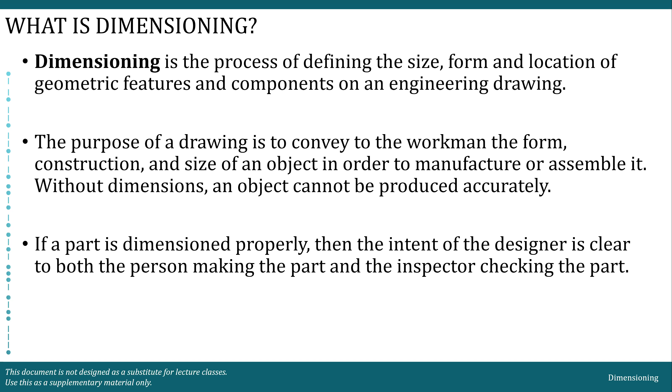We have different elements of a fully described drawing. We have the graphics. The graphics is yung mismong multi-view. Okay? And we have the dimensions. Yun yung ating gagawin today. And also the words, which are notes, which are also part of this lecture na dimensioning.

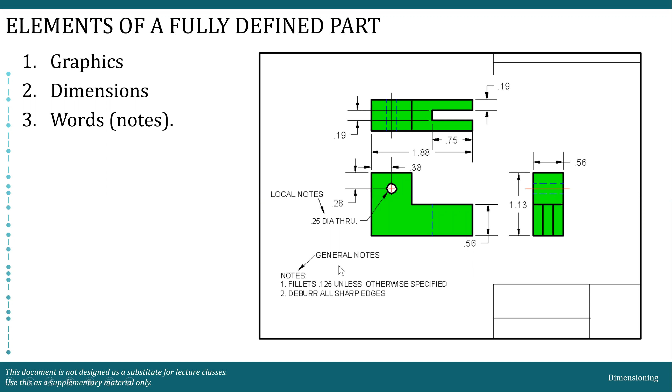So kung titignan natin dito, ito yung graphics natin, yung kulay green. Then the dimensions, marami yan. Yung numbers, yung lines, yung arrowheads, they are all parts of the dimensions. And notes, we have two types of notes. Generally, we have the local notes and we have the general notes. So yan, medyo madami-dami ito, pero madali lang naman silang intindihin.

So first, kailangan nating i-identify kung ano-ano yung components ng ating dimensions. Okay? We have what we call the dimension line. Dimension line is a thin, solid line which shows the extent and direction of a dimension. Dito sa dimensioning, lahat ng dimension lines, arrows, extension lines, leader lines, gagamitan natin ng HB pencil. Dark pencil siya, hindi siya H. So in dimension lines natin, example, this one, yung may arrowhead. This is your dimension line.

This is also a dimension line.

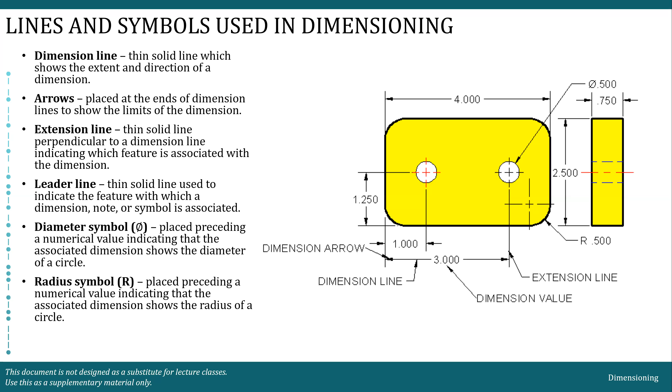As I've mentioned before, dalawa yung general na pinaggagamitan natin ng dimension: to identify the size and location. So yung mga dimensions natin could be either a size or a location dimension. For this example, itong dimension na 4 units, from this end up to this other end, is a size dimension. This is also a size dimension since it covers from top to bottom, as well as this one. Yung thickness niya, itong 0.750, is also a size dimension.

Itong phi 0.5 is also a size dimension because it describes the size of this hole. Yung radius is also a size dimension because it describes the size of the radius of this arc. Ang example naman ng location dimension ay ito. If we would like to locate the center of the hole, which is usually the case, we locate the center of a circular hole, then that is a location dimension. So hindi lang size, as well as the location, yun yung hinahanap natin. Size and location.

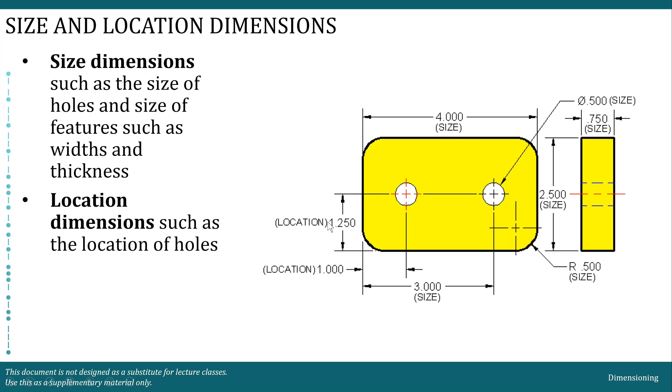Sir, need po ba lagyan ng size and location below the measurement? No. Yung nasa previous na slide, it's just a notation for teaching purposes. Pero sa plates ninyo, hindi kailangang isulat. Kahit sa practice, sa workplace, hindi sinusulat kung siya ay size or location.

Ayun. Wait lang, inom lang ako.

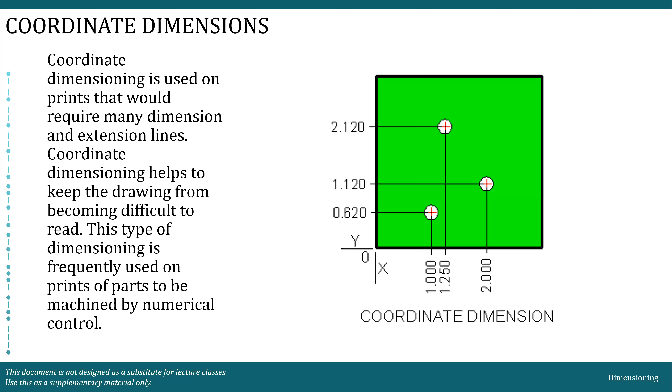Nawala yung isa. Ito pala, na-skip ko pala yun. Okay, merong isa pa, yung tabular dimension. Tabular dimension, as the name implies, meron kang table. So yung location ng A, B, C, D, and E, they are given in a table form. So, kailan to ginagamit? When a company manufactures a family of parts or assemblies that are exactly alike in shape, except for dimensions, tabular dimensioning is used on a drawing. Letters and numbers in a tabular form are used instead of dimensions to denote the size.

So kapag, let's say kunyari, kailangan mo mag-manufacture ng exactly the same shape na may ganitong distribution ng holes, tapos magkakaiba yung size. Let's say meron tayong small, medium, and large. So, instead of producing individual drawings and measurements and regular dimensioning, tabular yung ginagawa. So, meron ka na lang isang drawing plus, kunyari, small, medium, and large yung ginagawa mong object, then meron kang tatlong tables applicable to the same drawing.

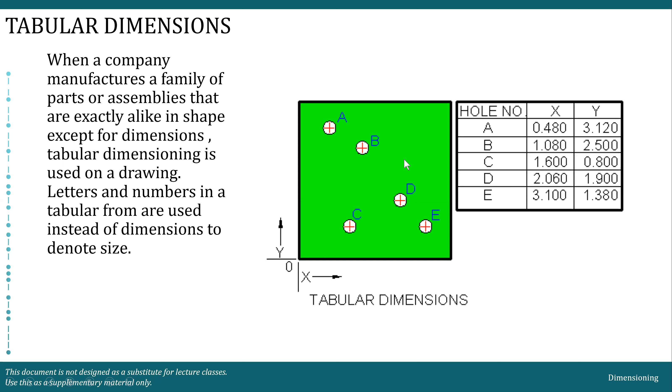Okay, so I've mentioned earlier that notes is a part of a fully described drawing, and we have two types of notes. The first one is what we call the local notes, and the other one is general notes. Local notes pertain to a specific area of an object. Local notes are pointed to a specific feature with a leader attached. Example nito, kunyari, describe natin itong hole na to. So ito may leader line ka. Ang tawag natin dito, this is a local note. By the way, dito meron ka nakikita nakasulat DIA. This stands for diameter. So 0.25 yung kanyang diameter.

Itong ganitong notation, yung DIA, this is an old notation. So hindi niyo siya dapat gamitin ngayon. Paano nga kapag diameter? Ang kailangan nakasulat sa inyo, meron kang phi sa unahan. So, phi 0.25. Tapos wala na itong diameter. Ito lang yung nagamit ko na picture kasi ito yung merong nakasulat ng local note. Then, ito is applicable only to this feature. That's why it is a local note.

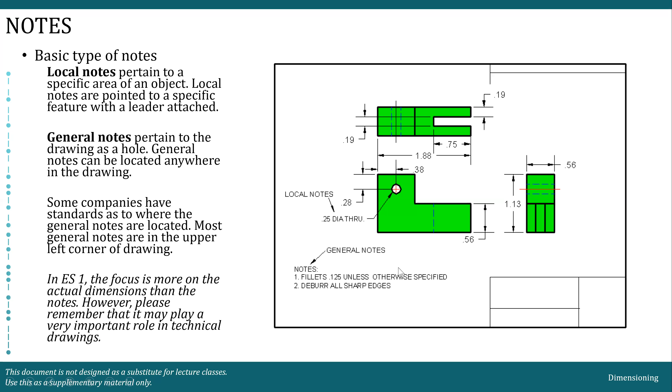Pag naman general note, this is applicable to the whole drawing. So, general notes pertain to the drawing as a whole. Dapat to may W. A whole. General notes can be located anywhere in the drawing. Some companies have standards as to where the general notes are located, and most general notes are in the upper left corner of a drawing. However, in ES1, our focus here is more on the actual dimensions than the notes. So, hindi gaanong pinagtutuunan ng pansin dito yung notes natin. Pero, tandaan nyo na pagdating nyo sa workplace, pwedeng maging importante yung local notes at general notes.

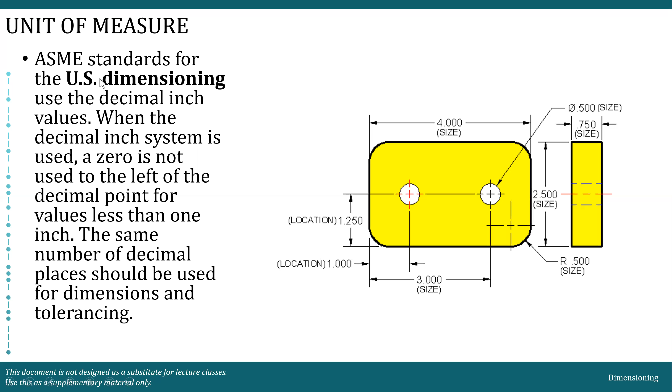Similarly, itong radius na to ay .500. Walang placeholder na 0 sa unahan. So that is US dimensioning or English dimensioning. Kapag metric dimensioning, dahil yun nga yung kinaibahan nila, meron ka namang 0. For example, pag tinignan nyo, R 0.38. So meron ng 0. So this is metric dimensioning. Isa lang yung example dito. So kapag metric, kapag less than 1 millimeter, kailangan lagyan ng 0 sa unahan. Ang daming error. So sa ES1, ang gagamitin natin ay metric. So we will not use the US dimensioning.

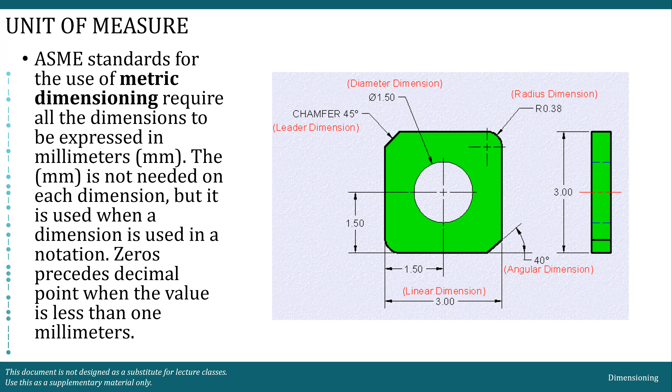Occasionally, a company will use, bakit parang daming error? Will use dual dimensioning, position or bracket method, that is both metric and English measurements on a drawing. We have what we call the position method. So yung position method, either nasa taas at nasa baba yung metric and English, or pwede namang naka-slash siya. Pwede rin naman siyang bracket. So itong letter B, this is a bracket method for dual dimensioning.

So yung isang system, nakadikit sa kanya inside a bracket. Okay? In ES1, since we are not using English, you don't need to worry about dual dimensioning. I'm just showing this to you para kapag nakakita kayo ng ganitong papel, I mean in workplace, alam nyo na this is just a dual dimensioning and you can choose whichever kung ano yung gagamitin ninyo.

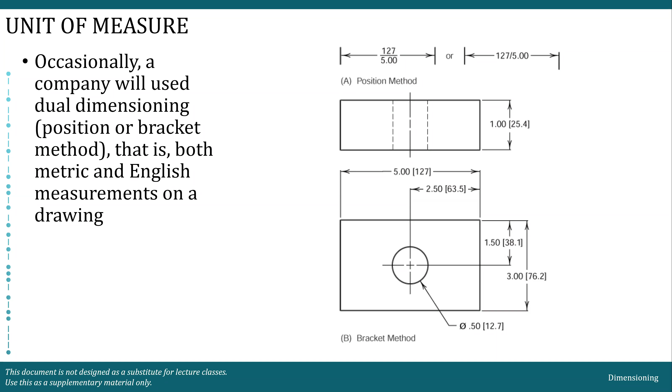So let's now proceed to drawing scale. The measurement of an actual object, not of the drawing, should be written in the dimensions. So kung ano man yung isusulat yung measurement dun sa drawing ninyo, it should be the actual measurement, hindi yung kung gaano siya kalaki sa drawing. Malinaw? So, ibig sabihin, kung magda-dimension kayo ng drawing ng kotse, dapat yung dimensions ng kotse is yung actual dimensions niya, which is, well, sobrang laki. Yun yung isusulat yung number instead of kung anong size niya dun sa drawing.

Okay? So, a scale of 1:2 means that 1 unit in the drawing translates to 2 units in the actual object. Thus, the drawing is smaller than the actual object. Kapag yung scale nyo naman is 2:1, kabaliktaran naman. Ibig sabihin naman nun, yung drawing nyo is mas malaki compared dun sa actual object natin. When writing the scale, you do not need to indicate the units. Instead of writing 1 millimeter is to 2 millimeter, you should just write 1:2.

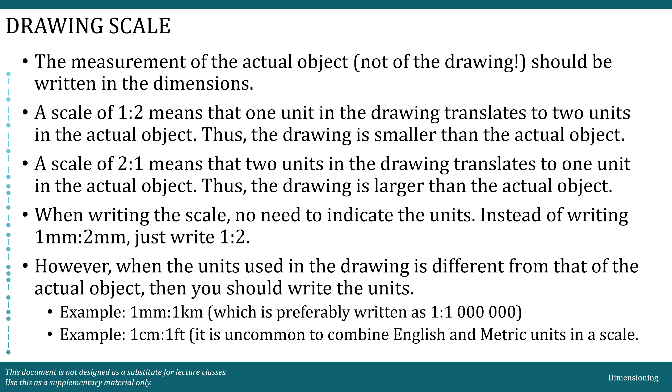Angular dimensions are shown either in decimal degrees or in degrees, minutes, and seconds. For our purpose, sa ES1, it's best that you use decimal degrees. So decimal degrees is the third one. Okay? Kasi medyo mahirap yatang mag-measure kapag ang ginamit nyo ay DMS. Okay? So just stick to decimal degrees.

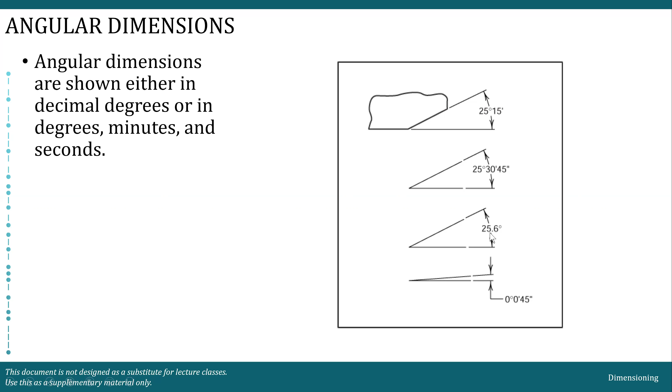Standard practices. First, the minimum distance from the object to the first dimension is 10 millimeters. So ito yun. From the object up to the first dimension line, that should be at least 10 millimeters. The minimum spacing between dimensions or between succeeding dimensions should be 6 millimeters. So from the first dimension, okay, yung susunod na dimension, dapat 6 millimeters apart sila at least.

Sir, pwede bang gumamit ako ng, let's say dito, instead of 10, gamit akong 20? At least naman to. For ES1, it will be marked as wrong. Okay? Kahit na at least yung nakasulat dito, I would like you to observe the exact measurement. Siguro kung 11 millimeters yan, hindi naman napansin yun. Pero as much as possible, you stick to what is written na measurements. So that measurement is from the object itself up to this line. So that's 10 millimeters. And then 6 millimeters ito.

Next, there should be a visible gap around 1.5 millimeters between an extension line and the feature to which it refers. So ito yung object natin. Kung papansinin niyo, yung extension line na to, it does not touch the object itself. So merong small gap, visible gap, approximately 1.5 millimeters na nandyan.

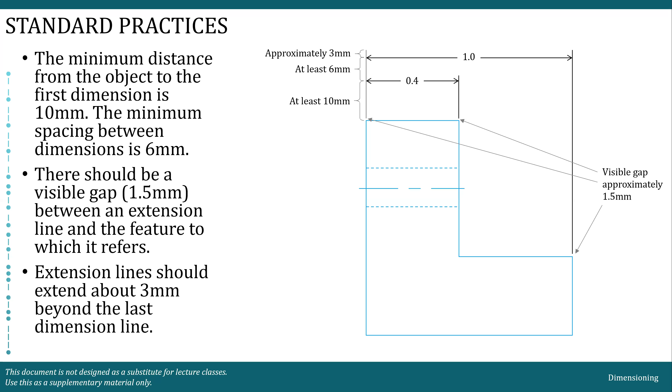Lastly, extension lines should extend about 3 millimeters beyond the last dimension line. So, kapag ito na yung pinakamalayo na dimension line, then there should be an extension of that extension line approximately 3 millimeters. Ito, 3 millimeters din dapat. So, yan yung mga standard practices na ginagamit sa pagdodrawing ng mga linear dimensions natin.

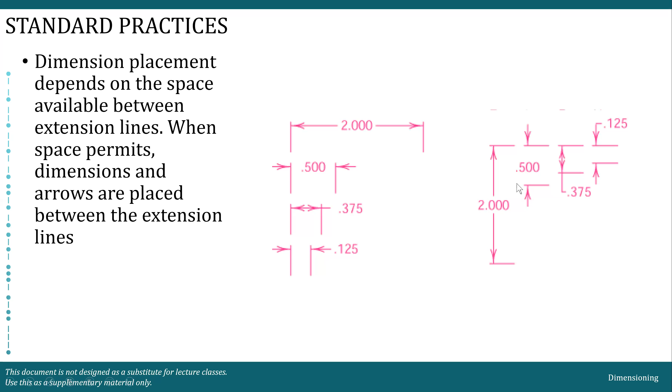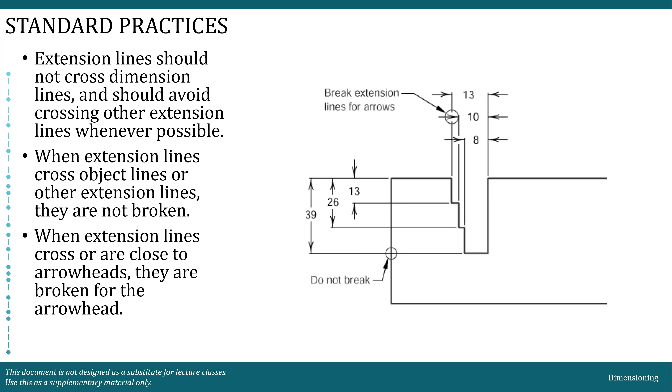When the location of the center of a feature is being dimensioned, the center line of the feature is used as an extension line. Center line. Ano ba yung center line? Center line, para siyang crosshair, di ba? Well, depende sa view, no? Sa circle, center line yung nasa gitna. Ang itsura ng center line, meron kang maliit na cross sa gitna. Tapos, para siyang phantom line. Do you know what phantom line is? Phantom line is an alternating long and short dashes.

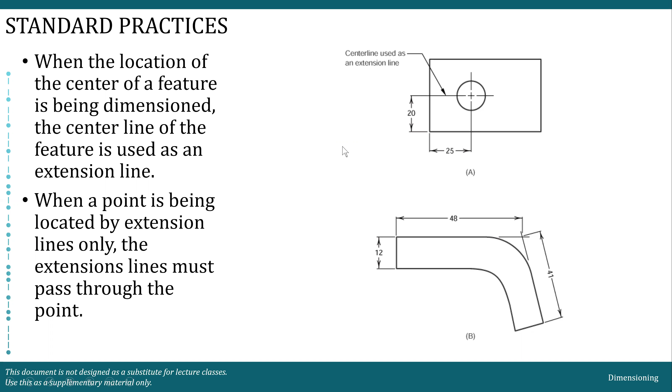Okay. Dimensions are to be kept outside of the boundaries of views of objects wherever practical. So, ulit, basta merong space sa labas ng object, you put your dimensions outside. Do not put your dimensions inside the object. So, this is a wrong dimensioning technique. You should put all of your dimensions outside. Exceptional cases kapag wala talagang space. Kung wala lang space, well, I think hindi naman lahat papasok sa loob. Probably, may cases na yung iba sa loob instead na sa labas mo ilalagay. Pero weird yan kapag masyadong maliit yung space to the point na lahat na ng dimensions nasa loob.

Wait lang ha. Wait lang. Okay.

Dimensions may be placed within the boundaries of objects in cases where extension or leader lines would be too long or where clarity would be improved. So ito yung exemption natin dun sa rule na kailangan nasa labas yung mga extension lines natin. And dimension, sorry.

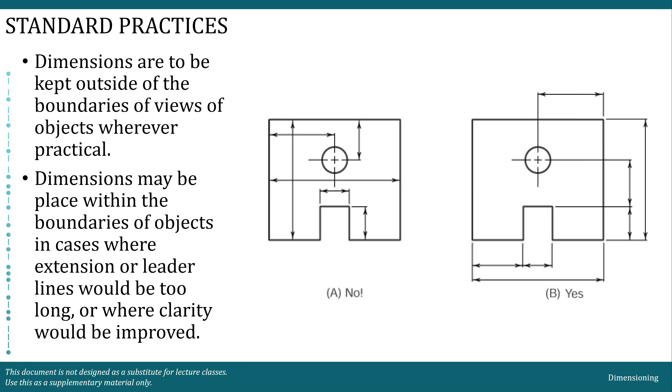What else? All dimension and note text must be oriented to be read from the bottom of the drawing relative to the drawing format. So, ang tawag natin doon, unidirectional dimensioning. Unidirectional, kahit na pag ganito siya, yung text na nakikita ninyo, it could be read from the bottom of the paper. So, kumbaga, yung orientation nila, pare-pareho. Yung lumang standard natin, ang tawag doon aligned. Kapag aligned siya, sinusundan niya yung direction ng dimension line. Then, kapag aligned, the numerals or yung dimension figures can be read either from the bottom or from the right side. Okay?

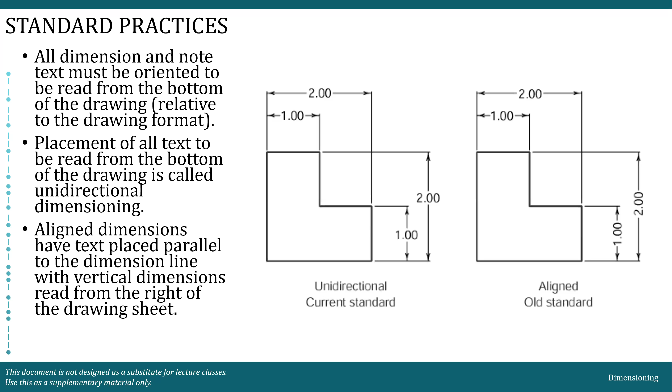If it is necessary to include a dimension which is out of scale, the out of scale dimension text must be underlined. Itong example na to, for workplace settings, sa ES1 din natin to gagawin. Lahat ng drawings ninyo, lahat ng dimensions ninyo, they will be scaled. Walang out of scale sa ES1.

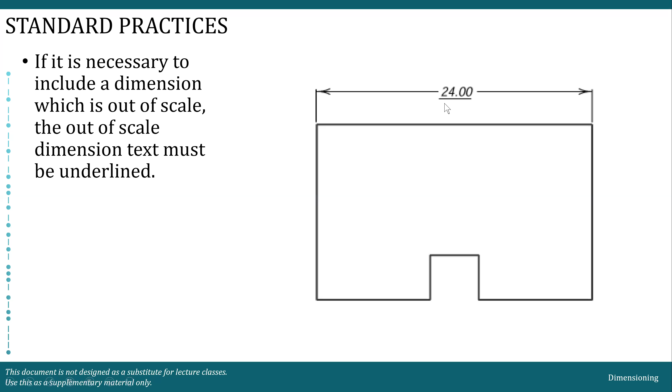In that case, you need to foreshorten, kumbaga, yung length ng rod para mapakita mo pa rin yung detail about the radius or the diameter of the rod. So yung length ng rod would be out of scale, and when you draw it, it should be written na naka-underline.

Okay. Standard practices: the symbol X is used to indicate the number of times a feature is to be repeated, the number of repetitions followed by the symbol X, and a space precedes the dimension text. So dito, 4 times diameter of 0.375, ibig sabihin, merong 4 na holes na ganun ang diameter.

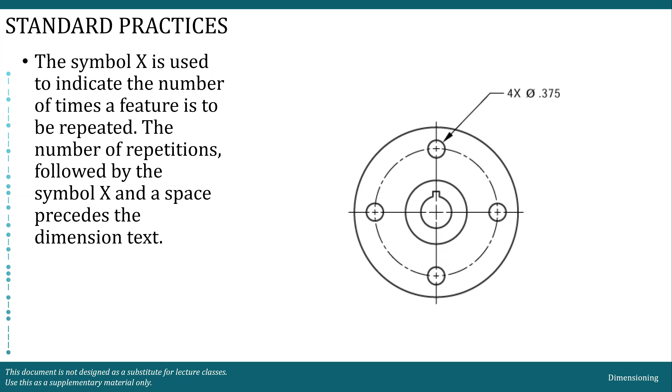By the way, the dimension figures should be written in engineering lettering. So, ibig sabihin, hindi yan pwedeng basta-basta susulat lang. Kailangan may horizontal guidelines tapos naka-engineering lettering.

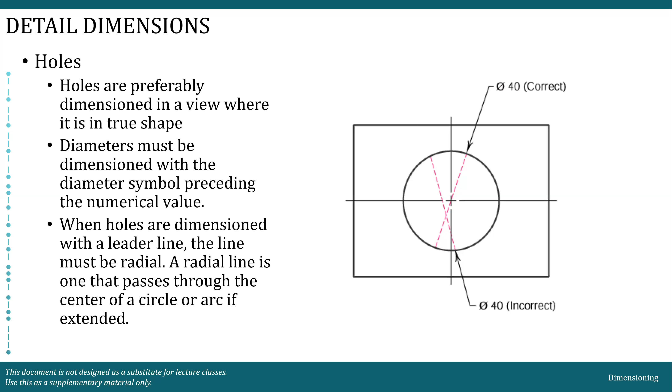And kapag nag-dimension ng hole, alternatively, which is not recommended, ang pwede nyong gawin to dimension the diameter of this circular hole is to put an extension line, tapos doon nyo ilalagay yung diameter. Kapag nasa circular view ka na, ganito yung gagawin nyo para identify yung diameter. So, put a leader line, then put the diameter symbol, then the value that you need to indicate. So this is for circular holes.

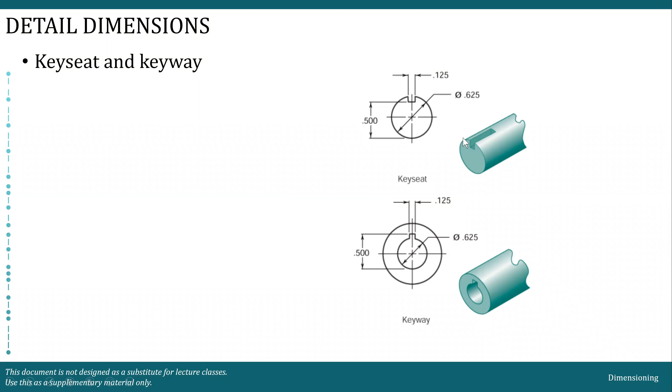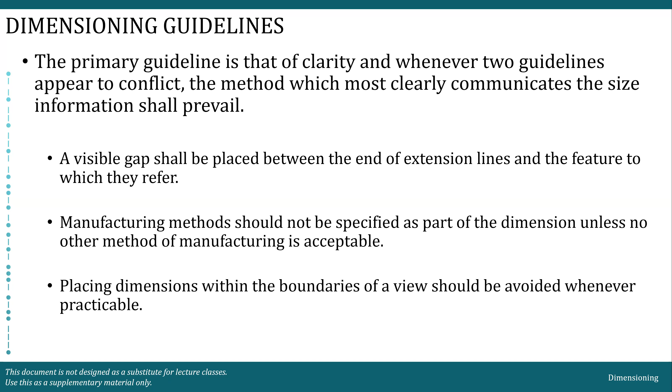Unless otherwise specified, angles shown on drawings are assumed to be 90 degrees. So kung meron kang mga objects, 90 degrees sila. Ibalik ko lang para makita ninyo. For example, ito. Hindi ko na kailangang ilagay dito na 90 degrees ito. Kasi ang assumption natin, this is 90 degrees.

Okay? Eh sir, ito, bakit hindi natin to dimension? I mean, ba't ko hindi kinuha yung angle na to? Kasi kapag kinuha mo yung angle na to, para ka nang nag-over-dimensioning. Why? Because this angle can be calculated based on the dimensions already given. Kunyari, nakikita niyo yung dimension na to. This dimension, let's say this is 10, for example. Itong mahaba, 10. Then this is 4. So if this is 10 and this is 4, then I know that this is 6.

Let's say this is 8. And this is 3. So if this is 8, this is 3, then this is 5. So meron kang 6, meron kang 5. I can identify the angle here. I can also identify that angle. So kumbaga, hindi ko na siya kailangang i-dimension pa. Okay? Of course, pwede rin naman na instead of given the length, pwedeng magbigay ka ng isang angle dyan.

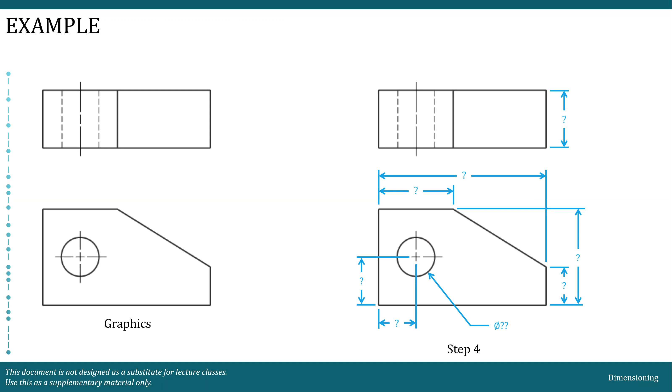Okay. The depth of blind, counterbored, or countersunk holes may be specified in a note along with the diameter. You don't need to think about this kasi hindi ito ino-observe sa ES1. It's just here for preparation sa workplace settings. Yung blind, counterbored, countersunk, mga specific types of holes. Usually, yung mga holes na yan para sa mga screws. Especially kung meron ba akong estudyante na ME, kayo yung makaka-encounter usually nito.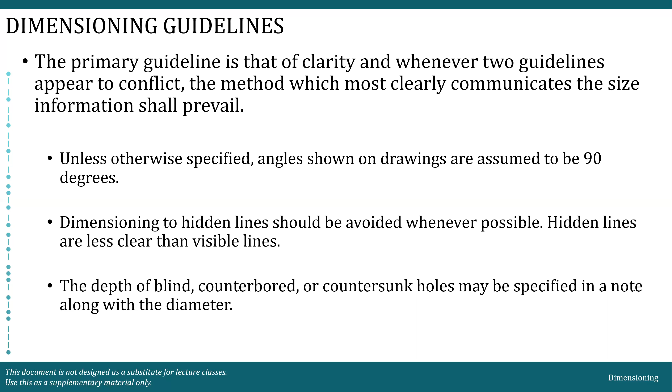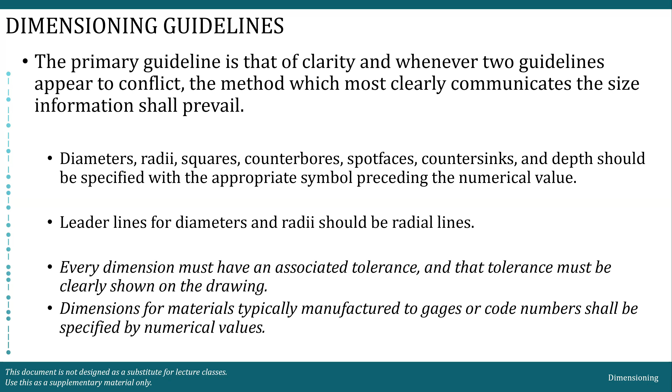Pero sa ES1, nag-decide kami na hindi na ilagay siya. First of all, hindi na namin na-explain yung purpose ng object. So kung di mo alam yung purpose ng object, it will be very difficult for you to specify kung ano yung appropriate na tolerance. Kasi depende talaga yun dun sa purpose ng object. So there. Then, that would be the end of our dimensioning discussion. So, siguro naman nakuha natin yung mga objectives natin.

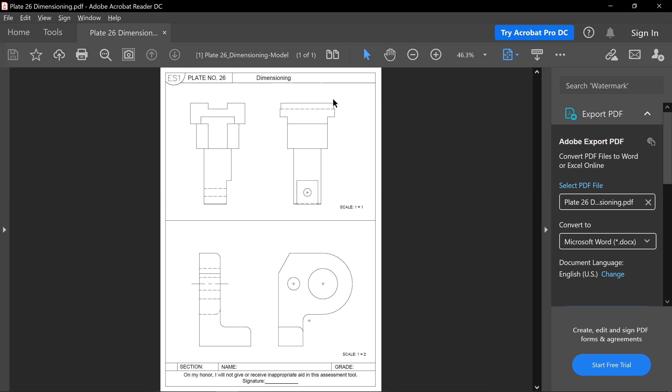Ang advice ko sa inyo, when you start dimensioning, you need to understand the figure muna. Hindi pwedeng basta lang kayo, ito merong dito hanggang dito, sige, gawa akong dimension line dyan. Hindi pwedeng ganun. Kasi you need to understand kung ano yung figure para malaman mo kung saang view ka dapat nagda-dimension. For example, ito. Ano to? This is a circular hole. Actually, this plus sign here is a symbol of the center. So dapat meron yung extension dito. So kapag dimension mo tong circular hole na to, saan ako magda-dimension? Dito ba? O dito? Dapat dito, kasi hole siya.

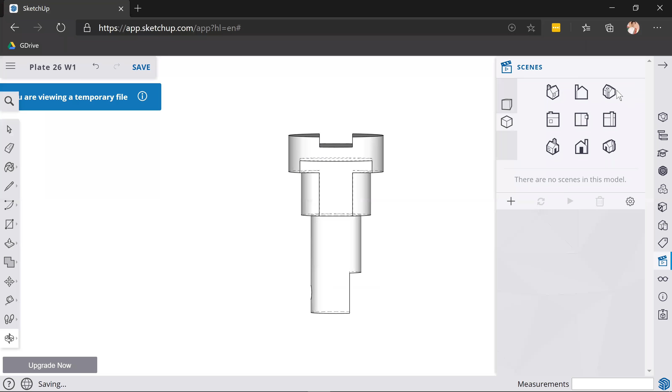Maraming reasons. Una, hidden line siya dito. So I should not be dimensioning dyan. Pangalawa, dahil hole siya, kapag circular hole, we need to dimension it in its circular view. So dito. And then, meron dalawang klaseng dimension: yung size dimension nito at saka yung location dimension nito. How about this one? Ito nasa taas. Ano bang itsura niya? You need to understand first kung ano yung itsura niya para mas appropriate yung magiging dimensions na gagamitin ninyo. At ang itsura niya, yan. Let me just press.

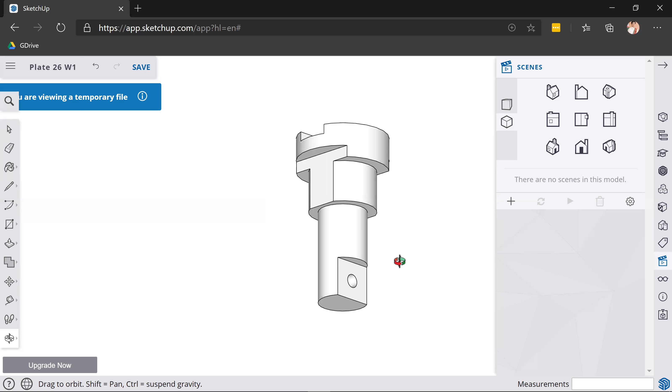Questions. That is the end of our dimensioning lecture. So if you have any questions, this is the time for you to ask them. No question. Okay. How about the rest? Okay, walang question. Malinaw ba? So, ganun pa rin, no?

Gagawin natin. Since we are reaching the end of the semester, kung meron kayong assistance na kailangan, well, I can't really give you the answer, no? Pero I might be able to bring you to the right direction.